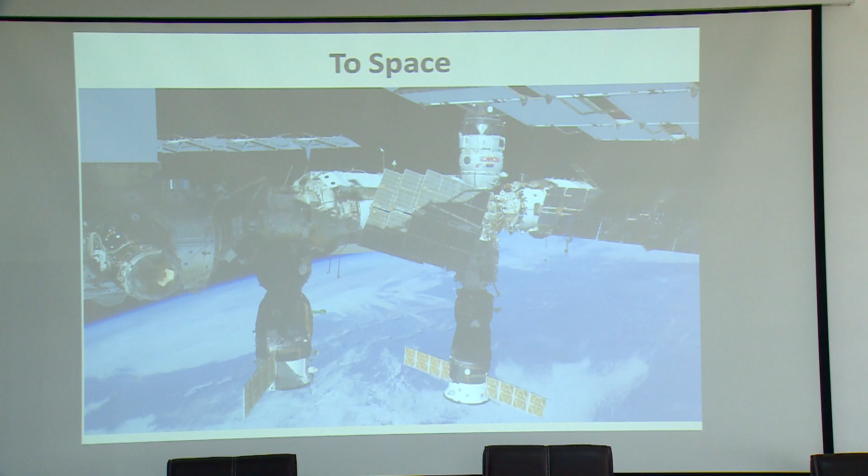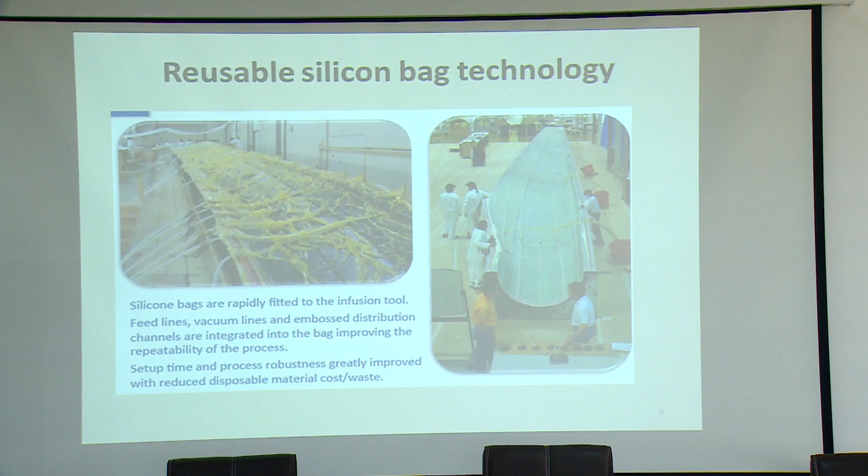Most of these are made from industrial composites, but my talk today will be mostly about biocomposites. So composites are everywhere - these are just examples to show how composite technology can be adopted. This is one composite formation for windmills, windmill blades. So this technology is available and is being adopted everywhere.

We were talking about the previous presentations, about how buildings have to be sustainable, how we have to have new technology. One example is where composites are used to make movable bridges. If there is a disaster, you bring a bridge which will help you transport people or other resources, and you don't have to worry about loss of life that much.

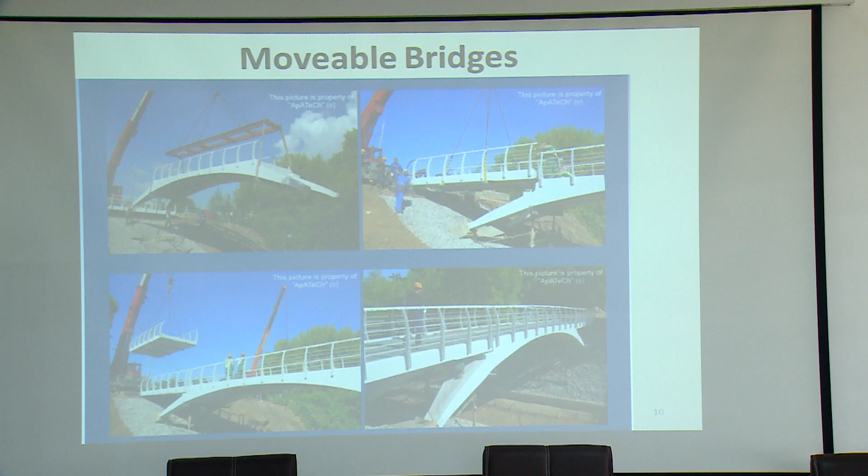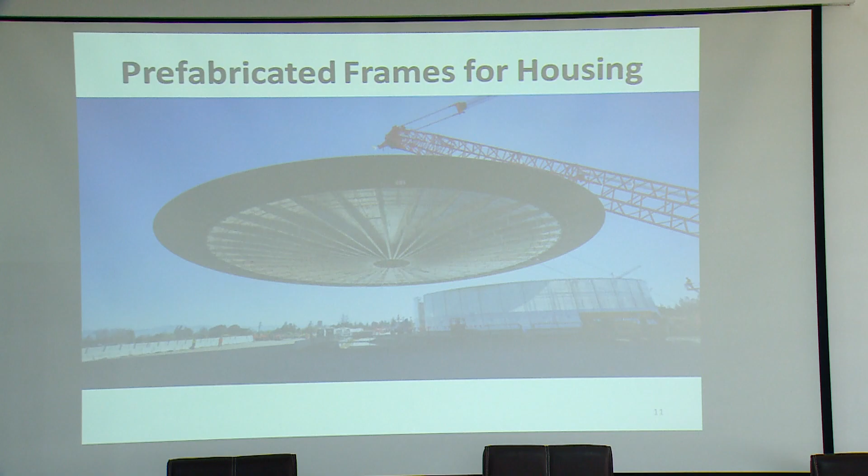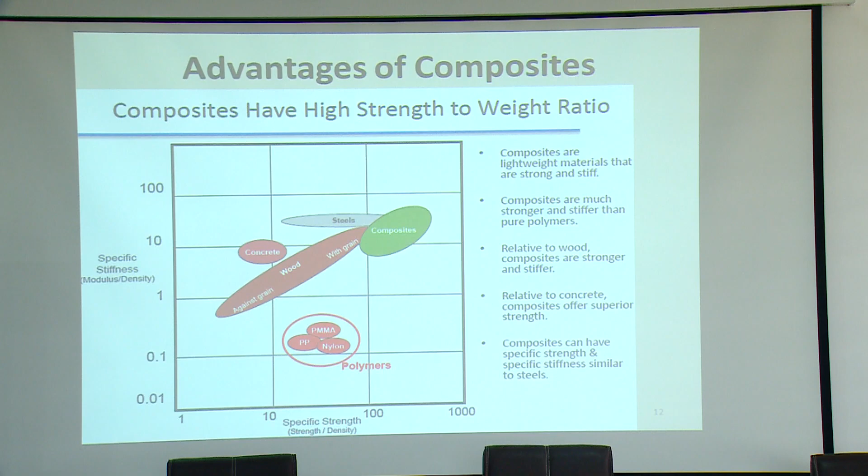Why do we need composites? One major advantage is they have a much better strength-to-weight ratio, as seen in this graph. That is a major reason we need composites for building applications. There are also many other advantages. We don't have to use cement, concrete, or water. Composites are probably much more sustainable compared to the regular building materials that have been used for a long time.

When you talk about composites, there are various ways of classifying them. There are different varieties of composites. The most common are fiber reinforced composites. We also have ceramic matrix composites, metal matrix composites, and polymer matrix composites. Polymer matrix composites and fiber reinforced composites are typically the most common ones.

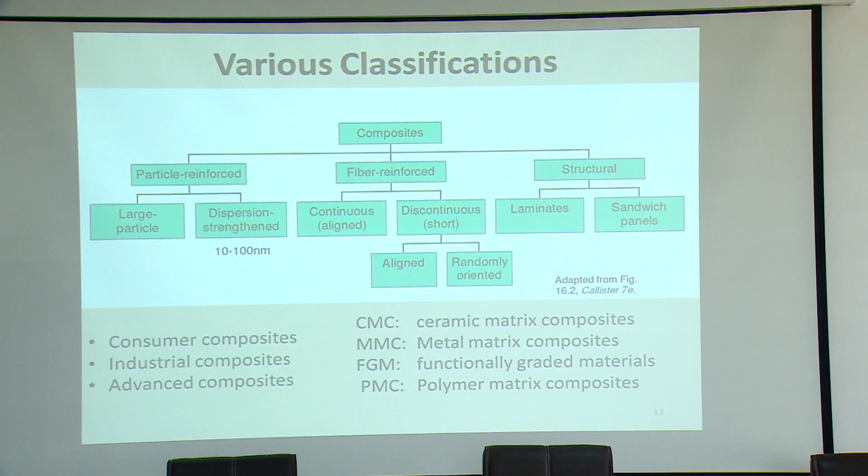If you go further, you can even classify composites in terms of the type of reinforcement they use, like particle reinforced or fiber reinforced, and in terms of structure they can be classified as laminate or sandwich panel. There are various types of composites and various ways of classifying them, so depending on your use and application, composites can be chosen.

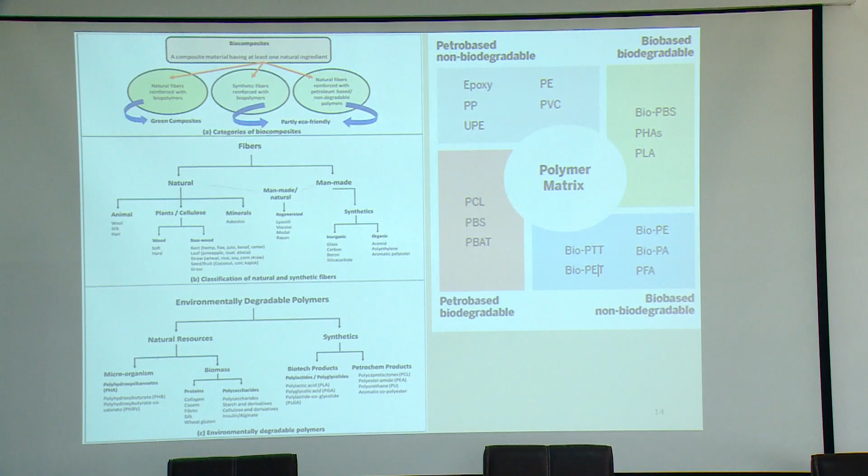My talk is mostly about biocomposites. So what do you mean by biocomposites? In composites there are two major portions: one is a matrix and one is a reinforcement. Biocomposites are defined as composites where at least one of the components is from a bio-based resource.

Using this definition, we can classify composites as partially biodegradable or completely biodegradable. Completely biodegradable composites are where both the matrix and the reinforcement are from renewable resources. This is what the slide shows here, with the classification done as in the previous slides. You can see the reinforcement will also be from a renewable resource, and the matrix will also be from a renewable resource.

This chart on the right shows the different polymers generally used as the matrix. Here we have to be careful: some are biodegradable, some are non-biodegradable, some are from renewable resources, some are from non-renewable resources. As the chart shows, there are polymers which are petroleum based but biodegradable, and some polymers which are natural based but still non-biodegradable. So depending on your needs, you have to choose the polymer, the matrix, and the reinforcement.

In terms of reinforcement, you also have plenty of choices. We have natural fibers, agriculture residues in much more detail, and man-made fibers, both natural biodegradable man-made fibers and non-biodegradable man-made fibers, which have been extensively used in the construction industry. You can also see at the bottom that depending on the technology, different composites can be made. This is one overview of all the possibilities of composites.

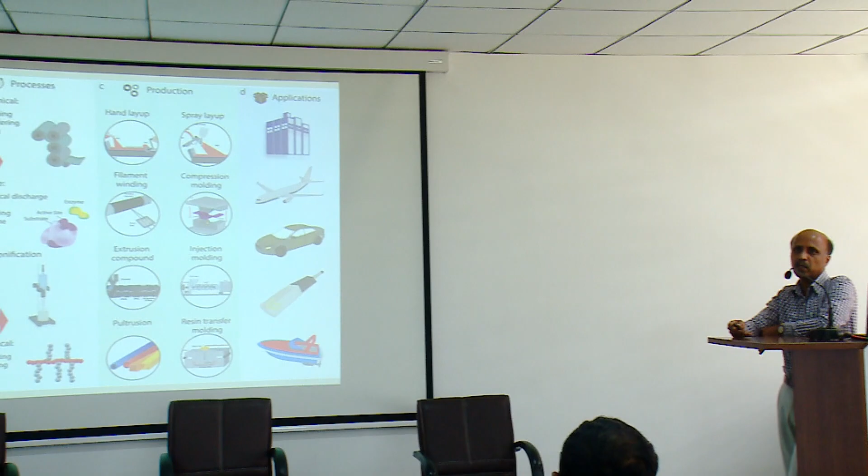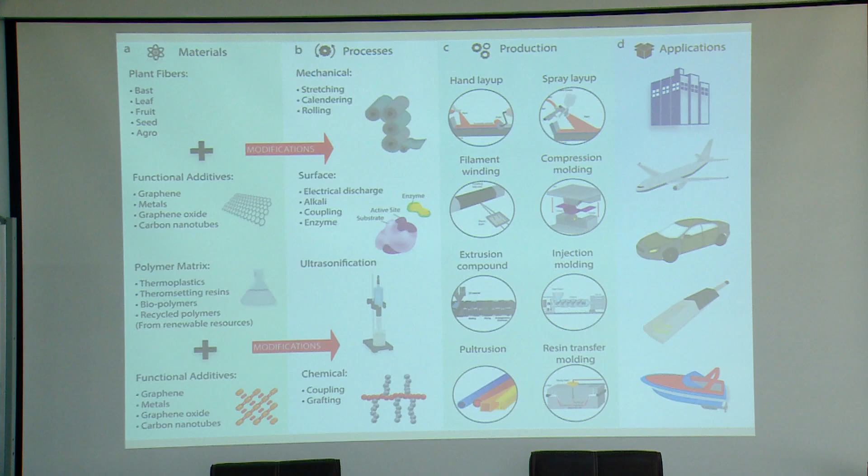As you can see, material-wise we have plenty of plant-based materials that can be used. Although composites basically contain only reinforcement and matrix, there are many more additives added to improve the properties further. These are called additives, functional additives, or polymer additives. They are added to improve flame resistance, to increase water resistance, or in some cases for specific applications. So we have a matrix, a reinforcement, and additives.

In terms of process, there are different steps before and after the composite is formed. Before forming, if you are using natural fiber, there may have to be some pre-treatments done. Even after the composite is made, we have to subject it to some chemical and physical treatments. Once that is done, there are a lot of techniques to make a composite.

A very simple technique is hand layup. As you can see at the top, you have a matrix and a reinforcement, which you lay together by hand. This is the hand layup technique, where usually most epoxy-based composites are made. We also have filament winding composites, and compression molding is also very common.

Likewise, we have injection molding, where two components can be blended and reinforcements can be added. Once injection molding has been done, we can again subject them to compression molding to get different components.

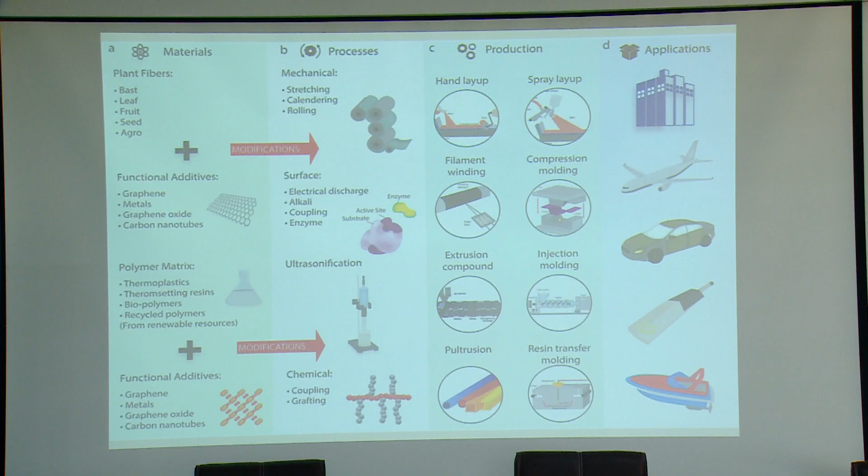So not only textile, as you can see here, not only civil construction, composites are everywhere, aerospace to automotive to sports, composites are used in various fields. Again, this is one more picture for better representation of the processes used.

You can note here one of the most common ways of producing composite is by extrusion. You have extrusion compounding, where you mix the reinforcement and the matrix. You get a pellet, and once the pellets are formed, you take it to injection molding or compression molding again and obtain whatever shape you want. The shape of the composite will depend on the mold you have.

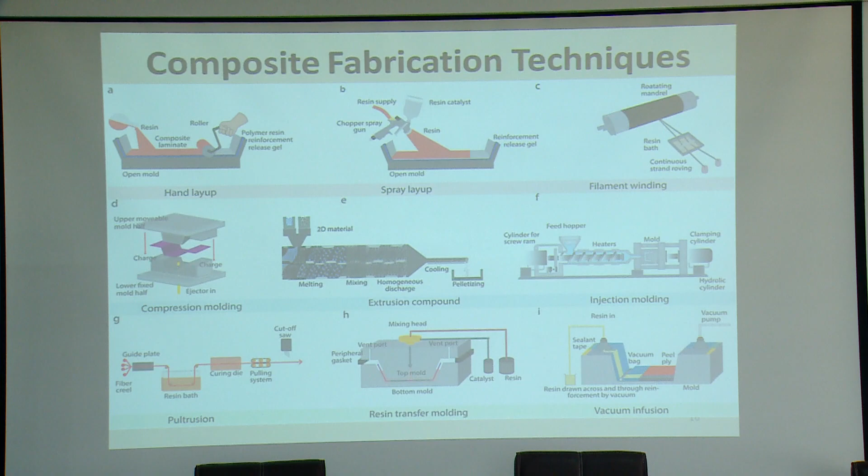So these are all the different aspects of composites. So why do we need sustainable resources, and what are the advantages of using sustainable resources for composites? This is where we are right now. As I said, composites and biocomposites in particular have been used for a long time.

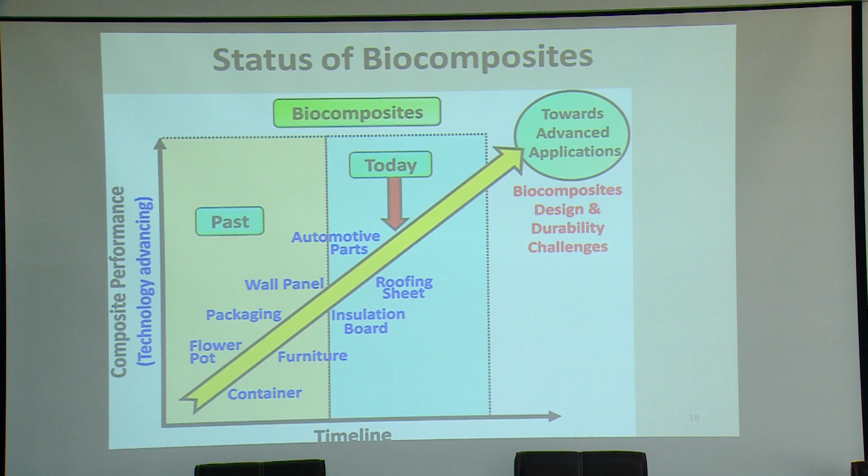Initially we were only thinking of containers and small packaging materials. Right now we have moved up to automotive parts and construction materials. But going further, there is a lot of scope for biocomposite use, especially in the construction industry. That is where we are looking into more detail, so that we promote the sustainable aspects we have been discussing since this morning.

In terms of renewable resources commonly used for composite construction, there are two major components: reinforcement and the matrix. For reinforcement, we can use natural fibers. Madam was talking about using coir. In addition to coir, there are a lot of biofibers - hemp, jute, sisal are all fibers that are being used.

And chitosan is a material that we obtain from seashells, sea animals. Of course, wool and silk are animal sources. So there is no limitation of raw material.

But one aspect we have to note is that these biofibers - hemp, jute and sisal - are specific, dedicated fibers which have to be grown. If you want jute, sisal or hemp, you have to grow them. You need land, water, all the resources required to grow the fiber. But still they are very much biodegradable - that is why they are called biofibers.

In terms of the matrix, we have both synthetic matrix and biodegradable matrix. The top ones in yellow are all biodegradable matrices. Polylactic acid is a synthetic polymer, but still manufactured using cornstarch primarily, and it is biodegradable. PHBV, PBS are all biodegradable polymers made from natural resources. But polypropylene and polyethylene, more commonly used in the market for composites, are from synthetic sources and are non-biodegradable.

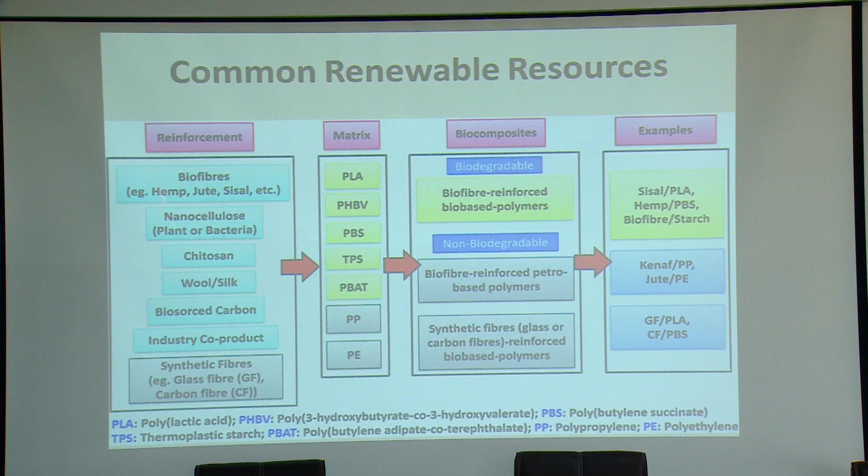So you can combine any of these natural materials with a natural polymer, or combine them with a non-biodegradable polymer. If you combine both as natural materials, you get a completely biodegradable composite. If you use only one, you get a partially degradable composite - that is the example here. And as Madam was mentioning, we have glass fiber and other things also you can combine with the matrix to get the composites of your choice.

So as I told you, if you go for biocomposites and talk about natural fibers, you have to grow the fiber - you need land, water and other things. Is there any alternative? As in the previous talk, they were mentioning there is not enough organic, fertile soil to grow crops. So what do we do about it?

So I always put this slide up, and I want to highlight the issue here. I see a major problem. The problem I notice is that if you see a corn crop, it grows about 7 to 8 feet in height and takes about 3 to 4 months to grow.

Once you harvest the crop, we are taking only the husk and the corn out from the field. And from the husk we are only removing the cob as a byproduct, and we are only collecting the seed. So effectively what we are doing is utilizing only about 10% of the crop we have produced. So what are we doing with the remaining 90%? We are usually scattering it in the field or burning the residue. This is where I see the opportunity - instead of treating this as a residue or byproduct, this should be a main product.

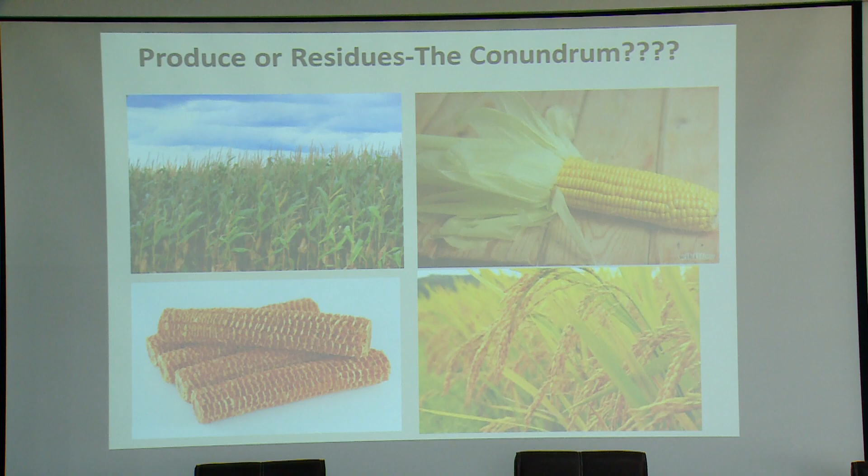Because without the stem and the stalk and the leaf, you cannot get your produce. So this has to grow. You will get the residues, but how do you use the residues is the major question.

Not only for corn, you take rice, you take wheat, any major agriculture crop, you will have the residues. So one more classical example: you want one glass of sugar cane, you get maybe 5 to 10 times the weight in the bagasse. A lot of bagasse is discarded right now, although some of it is used as a fuel for steam boilers in the sugarcane factories. But there is plenty available for us, a lot of residue available.

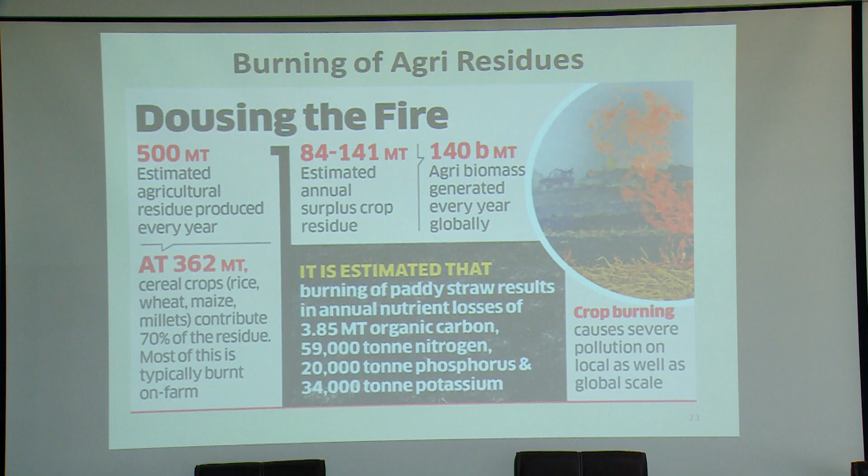And generally this is one of the issues we have. We have about 500, Madam was also mentioning, more than 500 million tons of the residue generated just in India every year. As I said, this you can't avoid. It will be generated, but most of it is right now burnt and buried. And this is not only an economic loss to the farmers, but it's a major environmental and health hazard also. You see every year there are so many issues happening in Delhi, pollution happening because of the crop burning.

So India is one of the major agriculture countries, and we have a lot of residue available to us if you want to go ahead and use that.

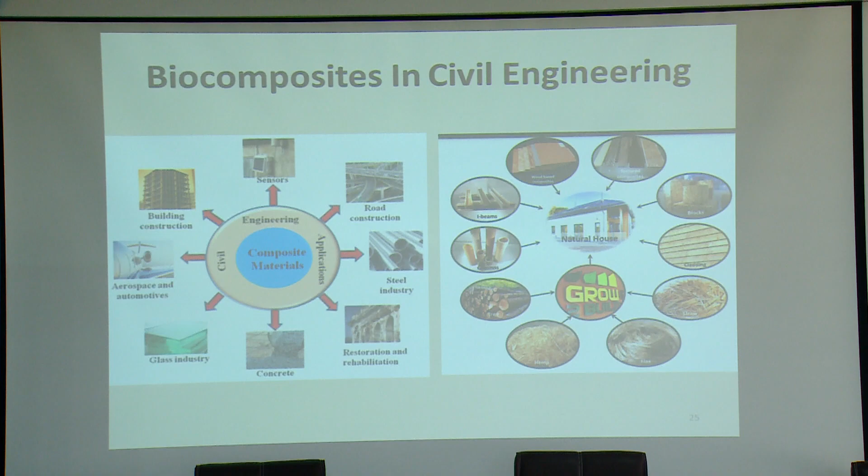So where can all the biocomposites be used in civil engineering? You can see here most of the places. You can use it in the roof, you can use it in the walls, you can use it for prefabrication or post-fabrication. So there are a lot of areas where biocomposites can be used in civil engineering applications.

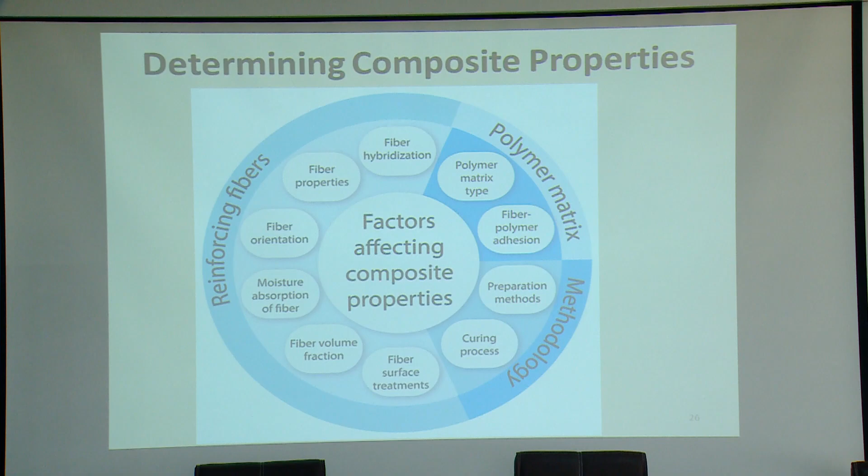But one of the major constraints of using the natural or biocomposites is the performance properties. Will we be able to meet the properties that we require for building and construction? But that all depends on how you analyze the material and what properties you are looking for. The fiber properties, the way you make the composites, the way you analyze the composites are all very crucial. So depending on all these factors, we can certainly develop a composite which will meet or exceed the targets of the biocomposites you want to manufacture.

So I'll give some examples where the biocomposites are already being used in practice. This is biocomposites made from rice residue. Once you grow rice, there are two major residues here: one is the straw and one is the husk. Straw is what is available in the field, and the husk is what you have to remove when you are processing the rice paddy into your rice.

So there are commercial examples where rice straw has been made into particle boards, straw bale, roofs, and even cement bonded boards. These are all practically available in various places across the world.

And in terms, when we talk about rice husk, it has been mixed with cement to reinforce cement to some extent, and also gypsum - these are all gypsum boards. So instead of using gypsum completely, rice husk has been used to combine with gypsum and make false roofings. As you can see here, this is an example where they developed rice husk based gypsum and rice husk based false ceiling tile. This will show an example where we have also worked on a similar concept.

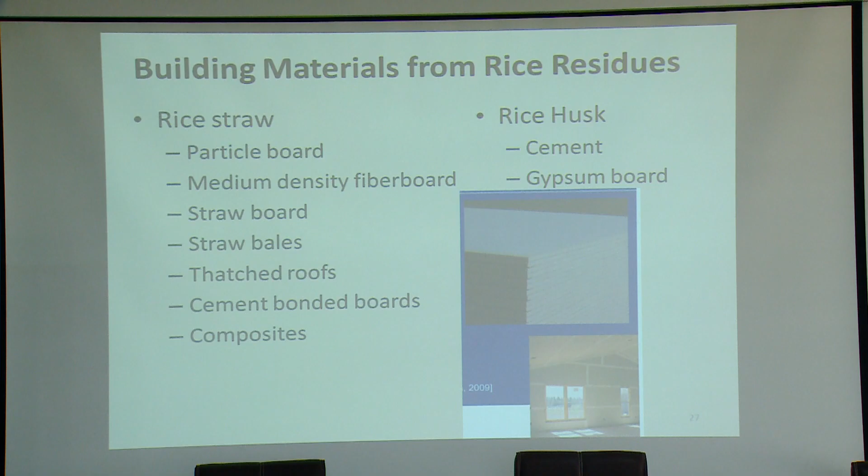So again, these are examples where rice straw particle boards have been made, and these are for partition walls. May not be suitable for outside walls, but interior walls certainly can be done.

It's not just reducing a residue; they have very good properties also. Some of the residues, like the protein residues we have in nature - sheep wool - they have very good thermal insulation and flame resistance property. Now, if you are making a wall out of sheep wool or chicken feather, it will give very good sound and thermal insulation. So that will again help you reduce your heating cost, thermal cost, and also have sound barriers. These are all the possibilities there.

As listed here, good sound absorption is possible. But right now, people are making these composite rice straw particle boards using urea and formaldehyde, which are not very eco-friendly. So we have to develop methods of developing biodegradable resins, which you can combine with the residue and make boards instead of using the urea formaldehyde resins.

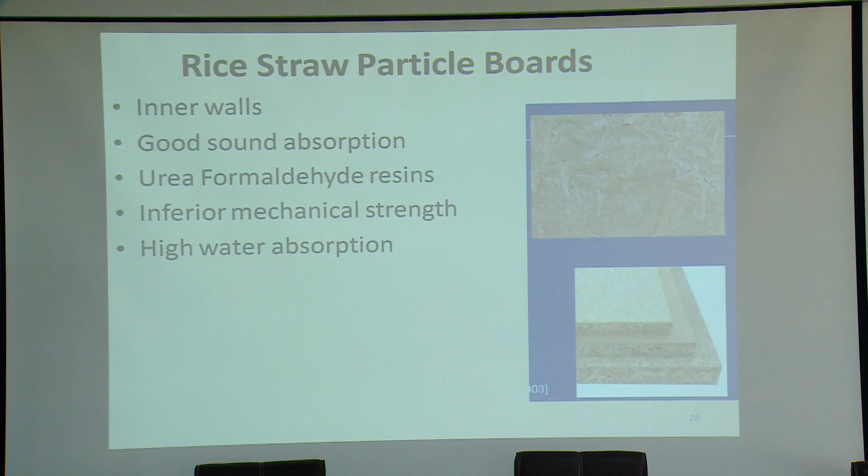This is one more example which is in practical use right now, where they have combined rice straw with a biodegradable binder, that is PHBV or PLA, and they have made bricks. So it's a self-assembling brick - you can use them to build a building.

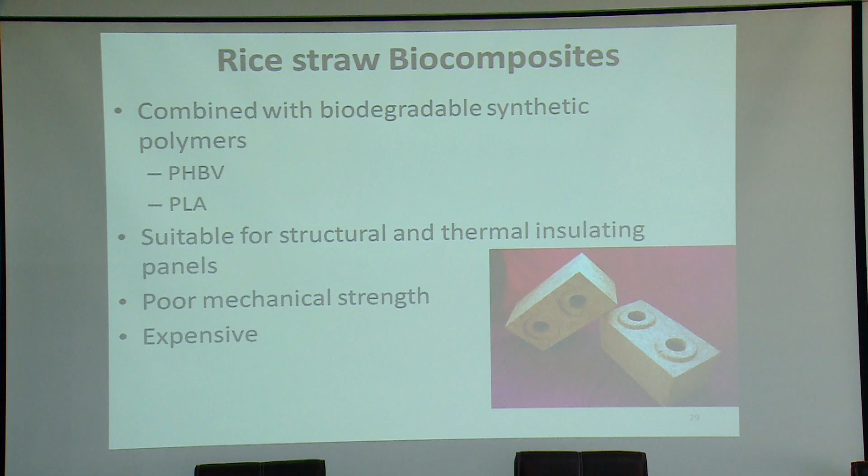Previously there was a discussion of using coir for concrete. Not only coir, hemp is grown extensively in European countries. In India, coir is available. Hemp is cannabis, which many countries have banned, but now they are finding it very, very attractive. Hemp has excellent properties—it's one of the best natural fibers in terms of strength and stability. That is why they want to use hemp, and also because European countries grow a lot of hemp.

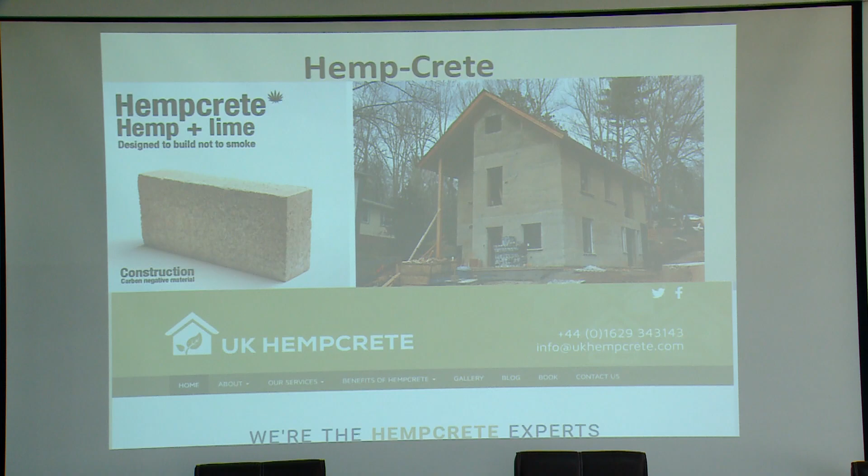So this is a building entirely built using hemp plus lime. That is one sustainable way. But how do you protect it from the natural environment? I'm not very sure—you have to have protection, otherwise natural fibers will degrade. They are susceptible to degradation, so you have to have external protection to the entire building. But most of the building is built using natural fiber and natural material.

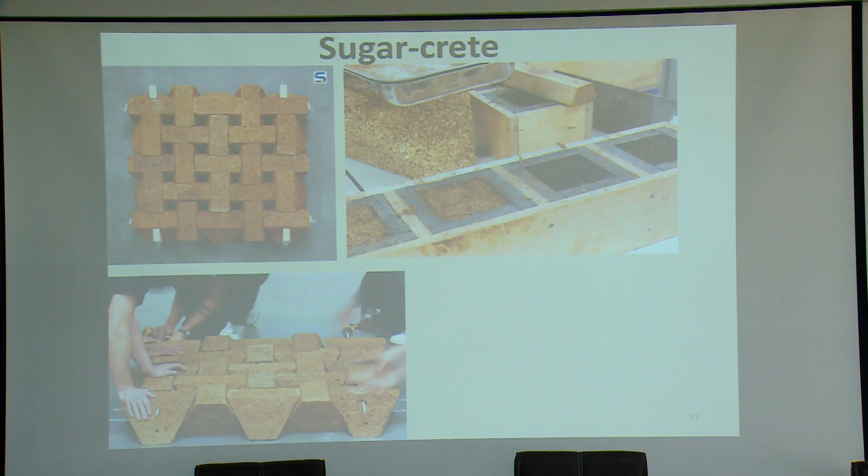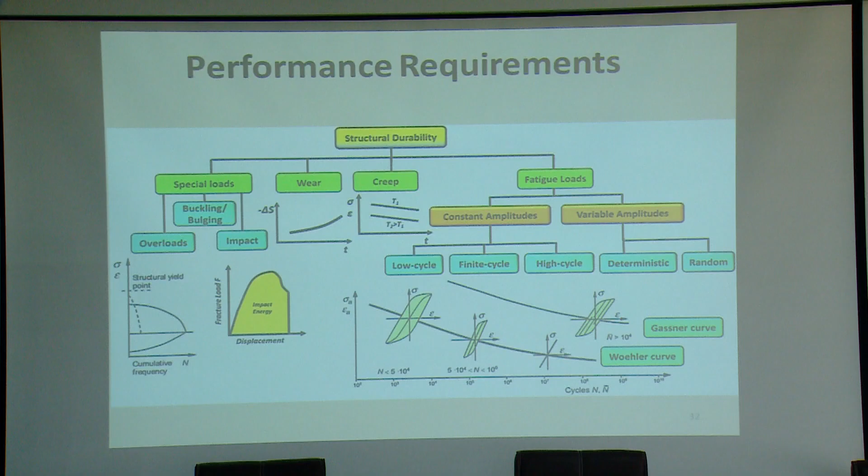But as I mentioned previously, there are a lot of performance parameters that have to be answered. There are a lot of questions rather than answers. If we are able to answer all these questions, only then can we claim to be really using agriculture residues for civil engineering applications. So one of the major limitations is the poor mechanical properties so far.

We also have one major issue—someone asking, is it possible to get consistent textile fiber? I'm sure you can get man-made fiber which is consistent from manufacturers, but certainly not natural fiber. There is a lot of processing and raw material variability. Those have to be answered. Batch-to-batch variations will be there—how do you account for that?

And being natural materials, they are prone to microbial degradation or environmental degradation. That question also has to be answered—how do you protect them from the natural environment? And again, cost-wise, we are not very sure whether the cost will really be beneficial compared to existing materials.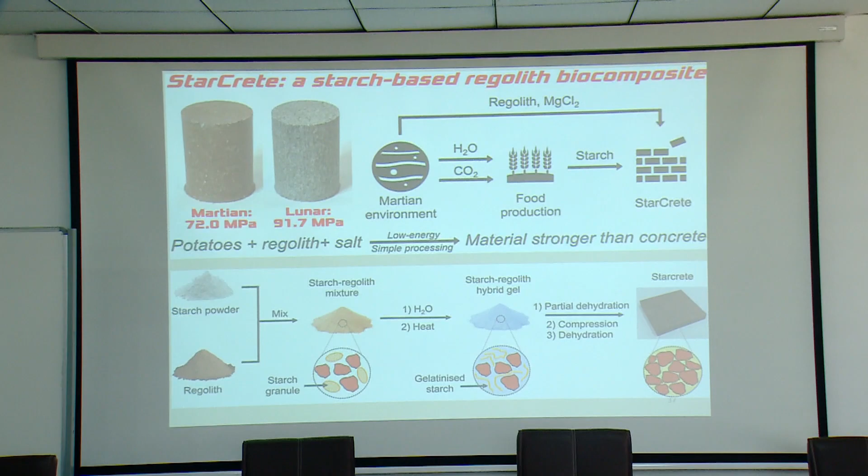I'm not going to talk about hempcrete and sugarcrete again, but it's also very interesting—I don't know how they get the Martian soil, or soil meant to mimic the Martian environment. They combine it with potato starch or some other biodegradable material, and claim to have developed a material suitable for use not only on land but even on Mars. That's why they call it StarCrete, based on the Star Wars phenomenon. They claim it to be stronger than concrete. So these are all happening—now there is nothing which is non-biodegradable. Everything is biodegradable here, and everything is sustainable.

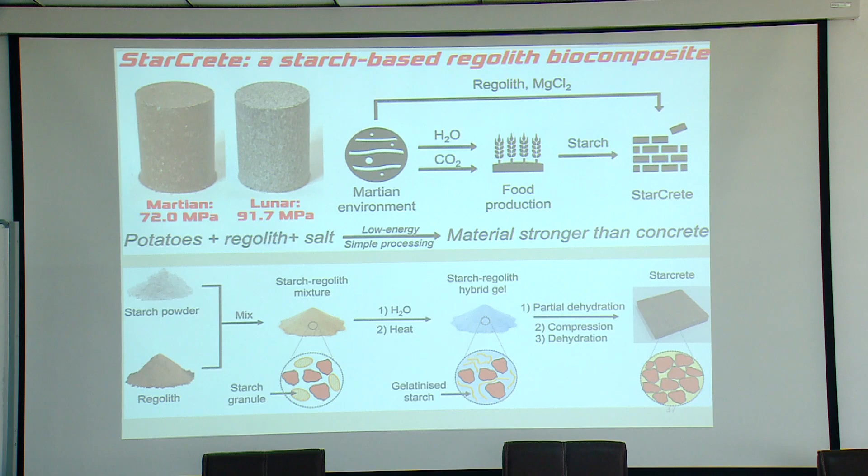This is also very interesting. We also had experience of some young entrepreneurs here coming and wanted to test this kind of cement and building materials. What they've done is they take mycelium, which is nothing but mushroom, one kind of fungus, and depending on the structure, they make a base.

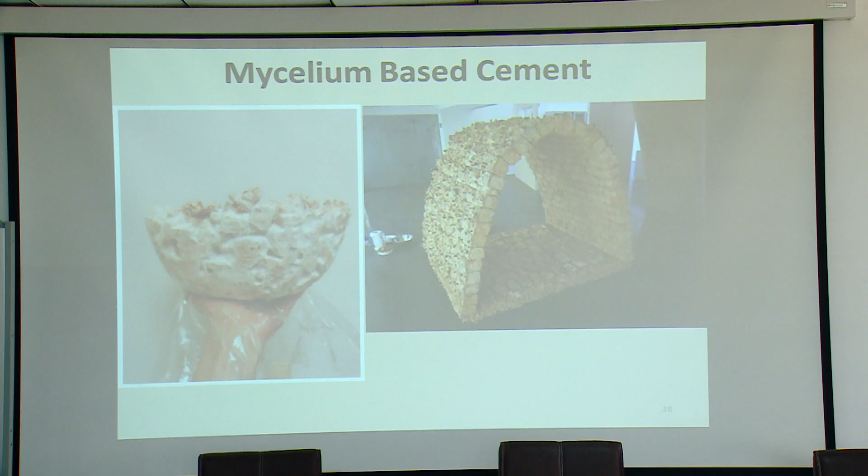Once the bricks are available, you can build buildings out of that. It is not just fantasy. You can see here they have made an entire building using mushroom bricks. So there is nothing non-biodegradable here.

But as I said, there are limitations. I don't know how water resistant and environmental degradation resistant they are, but practically, you take an agriculture residue like sugarcane waste or rice straw, put some fungus on that, cultivate it, and it becomes bricks. You can practically use it in a very sustainable manner.

This is what other people have done. We also work on sustainable composites using bio-based resources. In the next few slides, I will show the work we have been doing here. This is the overall depiction of what work we do here.

In our lab, we use agriculture residues and convert them into various products. One of the major products we make is false ceiling tiles. As I said, gypsum-based tiles are non-biodegradable and non-renewable.

So we use different types of agricultural residues: sugarcane bagasse, groundnut shell, and jute fiber. And we make replacement tiles for gypsum. You can come down to the lab, where we have replaced the entire lab with these bagasse-based tiles.

We use both biodegradable and non-biodegradable binders here, and we don't have any restriction on the raw material. As you can see, we can use bagasse, any grass grown outside, groundnut shell, and rice straw. We also have mulberry stems, coffee husks, and sheep wool.

Sheep wool is a very unique resource because of its thermal insulation, heat insulation property. So all this we have used and we have conducted different studies.

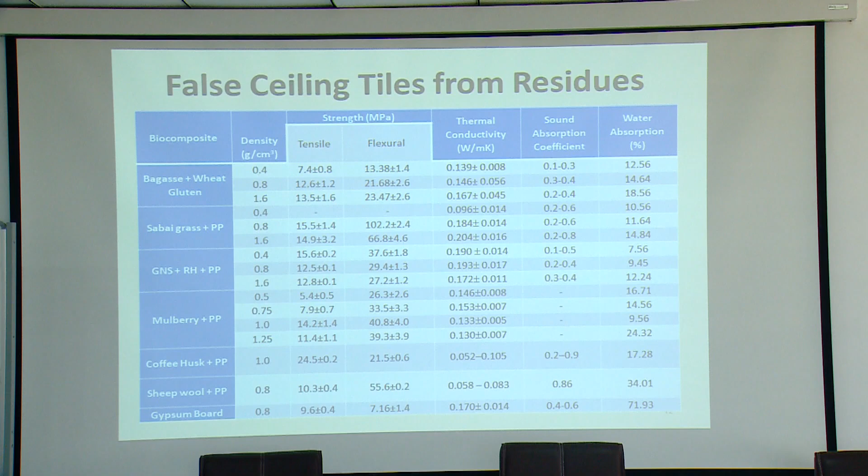So this is one approach where, if you want to improve the properties, it's very simple: you use some compatibilizer or a flame retardant chemical. The process we follow is not so sophisticated at all, because we want to keep the cost simple.

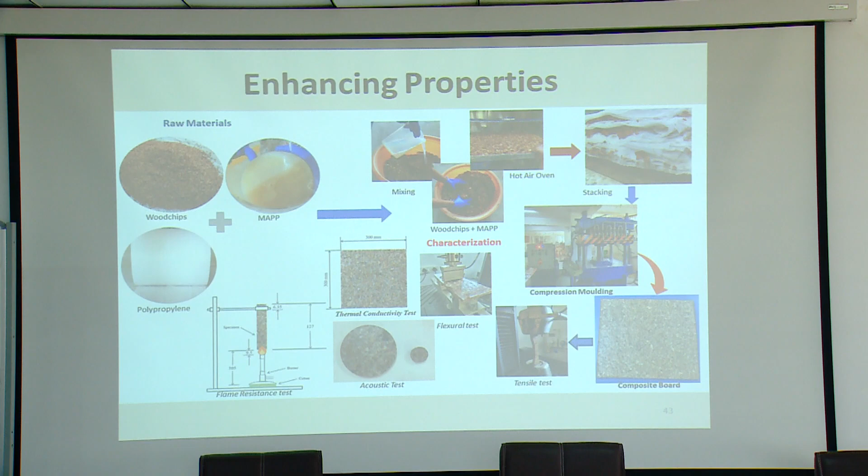One more point I want to emphasize is that so far we are not treating our raw material. Whatever agricultural residue we get, we use it in raw form, so we can maintain low cost and also retain the inherent property of the raw material. If you treat agricultural residue, in many cases we lose that inherent property, so to retain it, we don't treat the raw material.

We also had a project where we used waste plastic, which is discarded, and also rubber from automotive tires. We combined the waste plastic and automotive tire rubber and made composites for pavement blocks.

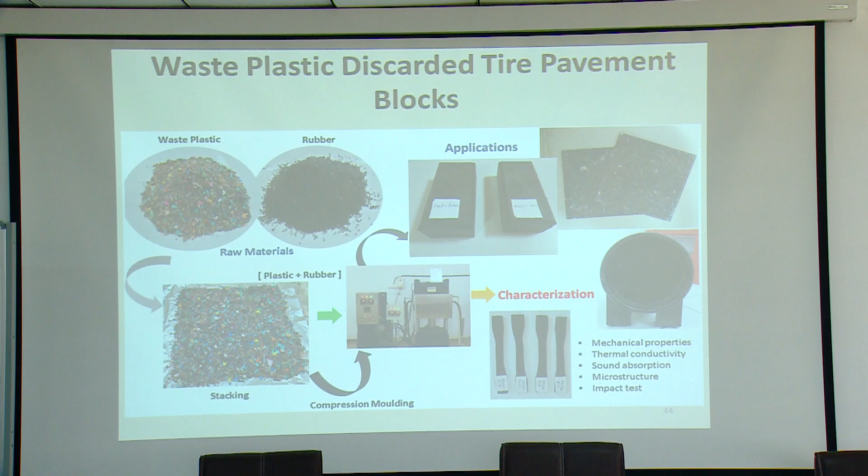So these are pavement blocks made using rubber, which is a non-disposable, non-biodegradable material available in large quantities from automotive tires after their use. So it can be reused in this way. That's what has been done.

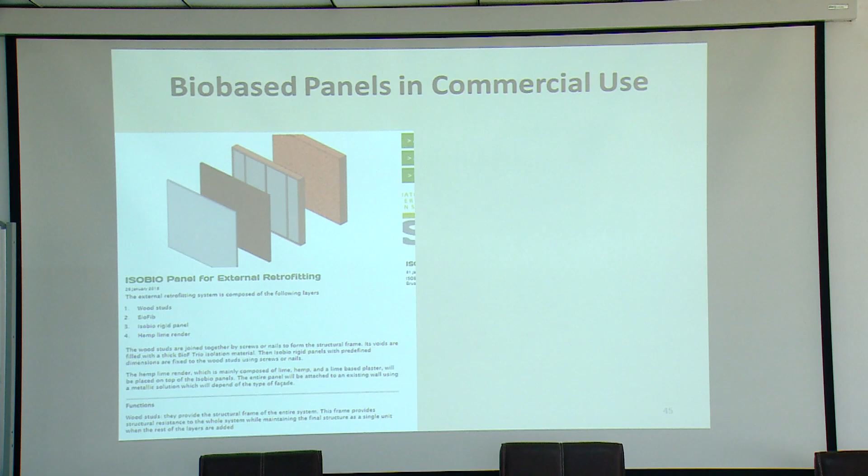And again, this is an example of how biodegradable materials are already in the market. This is one initiative in Europe where they want to build entire buildings only using sustainable materials based on biocomposites.

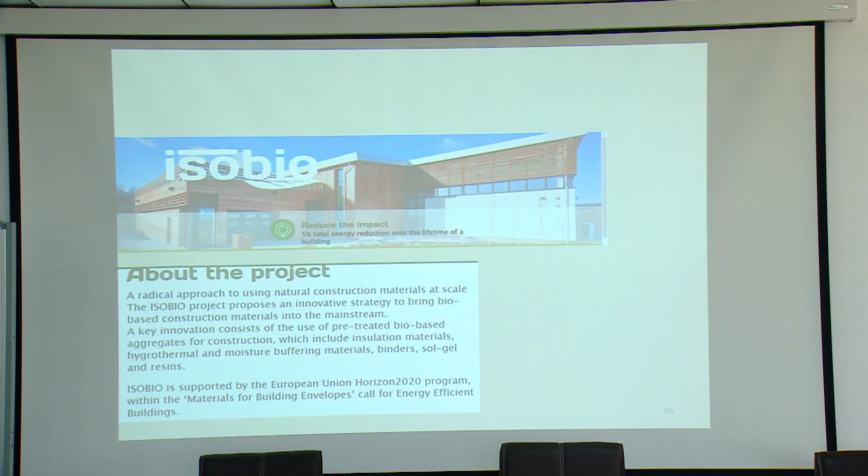So we are going back in time, replicating what was practiced long ago, to make engineering more sustainable.

This we have seen, we have gone so far. So what is the future? Is there a future in biocomposites, or where do we go next? There are plenty of scopes to explore.

That is because of a glue. More interestingly, researchers found that if you set fire around the ant hill and measure the temperature inside, it remains almost constant irrespective of the external temperature, which goes much higher than ambient. Based on this concept, buildings have been designed where automatic airflow happens and you never need air conditioning. This has been practically implemented.

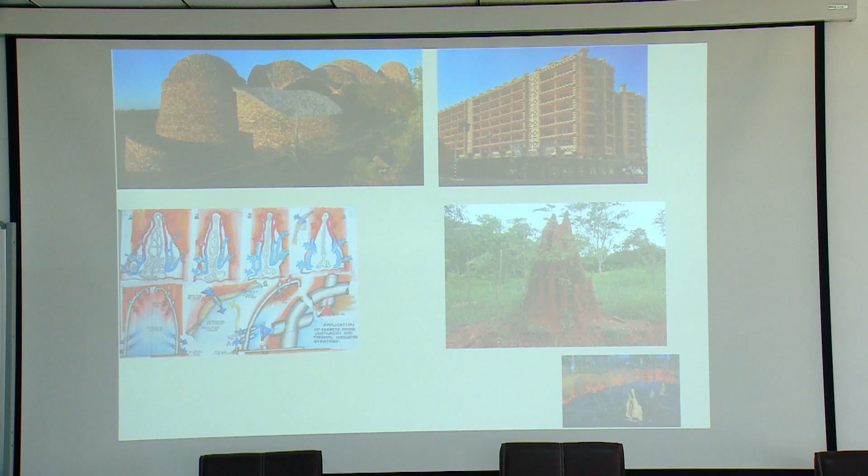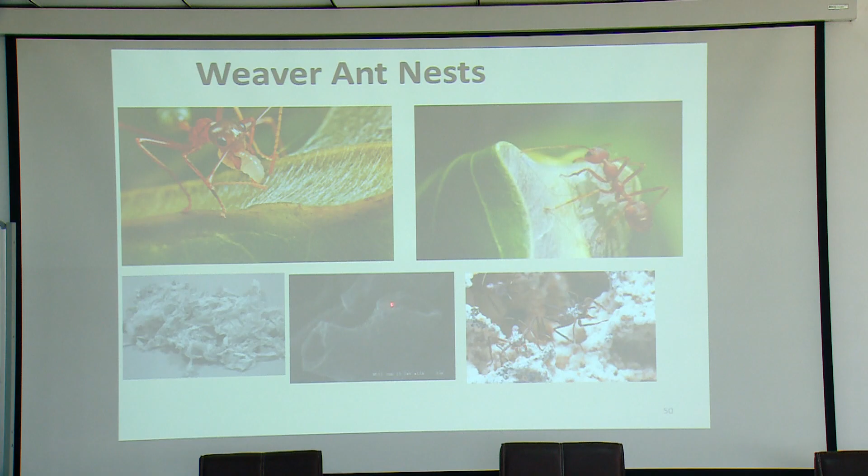So can we replicate this to make buildings better? This is another example we have not realized all these years: usually if you look at materials, if a material is very stiff, it has strength, but strength and stiffness tend to be in opposite directions.

If we can understand this aspect, I think it will help us a lot in building sustainable materials for the future. In conclusion, there is unlimited scope for composites in the construction industry, but we certainly have to look at sustainable green materials. In my view, agriculture residues are where there is a future, and to improve sustainability much further, more research and development is necessary.